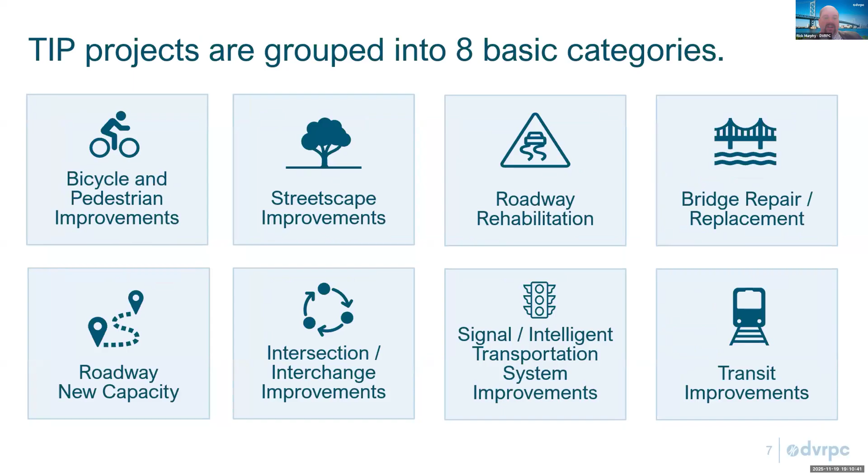These are multimodal programs, meaning they include automobile, transit, pedestrian, cycling, and freight projects as examples. Some of the projects are bicycle pedestrian improvements, roadway rehabilitation, bridge repair replacements, interchange improvements, and transit improvements.

A TIP project can improve multiple categories of those. So an idea can originate to solve one problem, but it can grow to address other opportunities. A roadway rehabilitation or reconstruction project could include improvements such as bike lanes, sidewalks, or traffic signals.

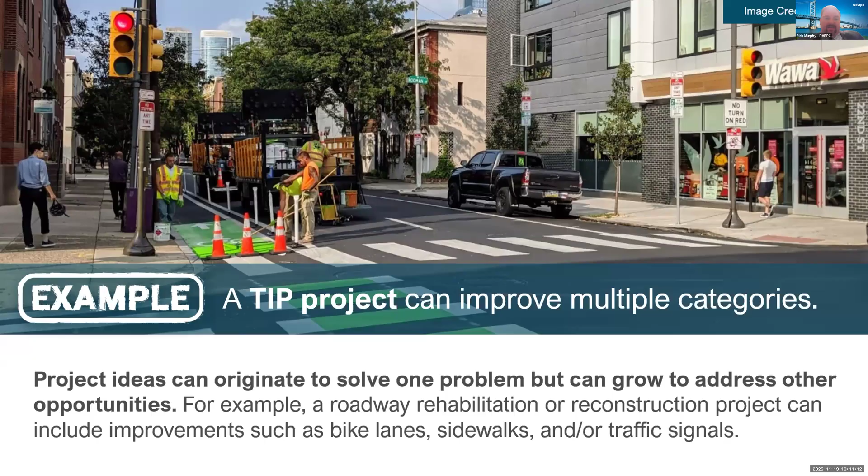An example is the Lafayette Street Extension project in Montgomery County. This was located at the junction of multiple modes of transportation, including regional highways, SEPTA's Norristown Transportation Center, and the Circuit Trails Network.

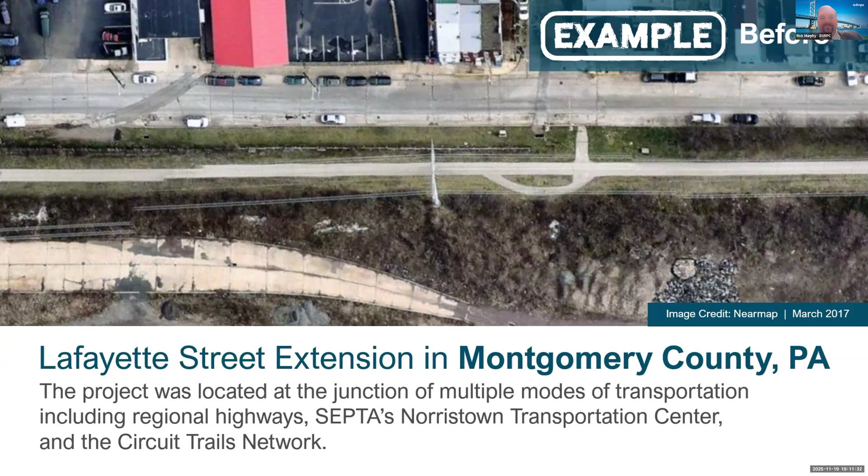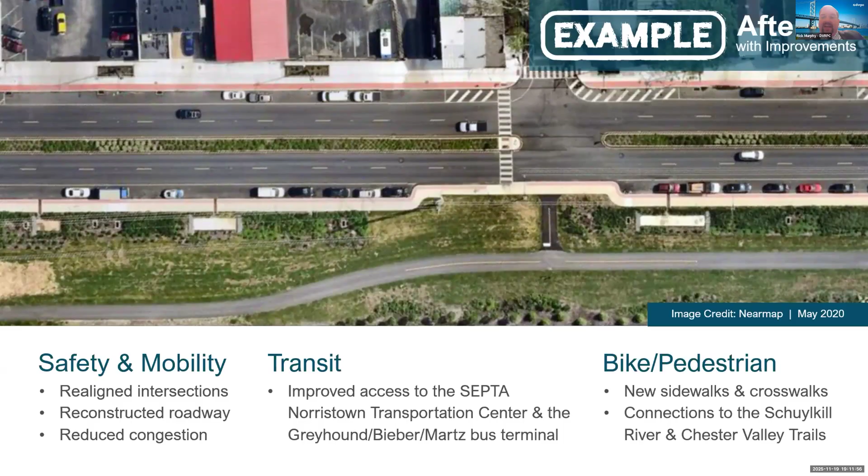Now, intersections have been realigned. The roadway has been reconstructed to reduce congestion. There's been improved access to the SEPTA Norristown Transportation Center and the Greyhound Bieber Martz bus terminal, and new sidewalks and crosswalks have been installed, and connections to the Schuylkill River and the Chester Valley Trails have been connected.

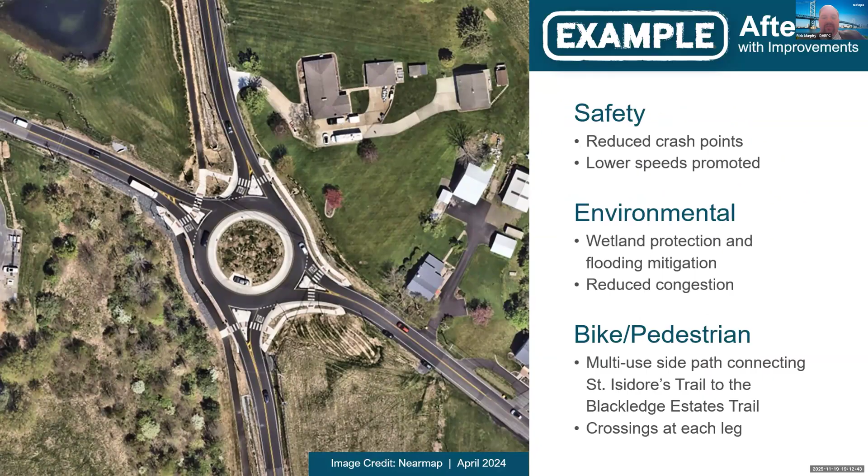Another example is Porter Road and Old Bethlehem Pike in Bucks County. The project improved an intersection from a four-way stop to a roundabout. This roundabout reduced crash points and has lowered speeds to promote safety. Part of the project included wetland protection and flood mitigation, and also aims to reduce congestion. There were crossings at each leg of the roundabout, and a multi-use side path connecting trails were installed.

So how the TIP is funded: we have approximately 500 plus TIP projects between the two TIPs for New Jersey and Pennsylvania. The federal funding comes from Congress. The latest legislation is the Infrastructure Investment and Jobs Act, which is set to expire on September 30th of 2026. That funding then flows to our federal partners at FHWA, Federal Highway Administration, and FTA, Federal Transit Administration. On the state side, they do something very similar at the legislature level, where they dedicate funding to the Transportation Trust Fund. Both federal and state funds then flow down to either transit agencies or the state DOTs to go on to either transit projects or multimodal roadway projects, and depending upon the project, some local funds are also part of it.

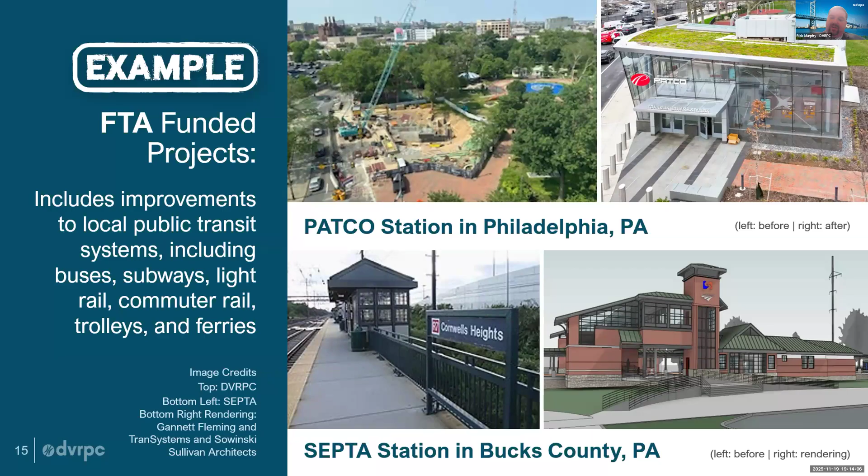Switching gears a little bit, DVRPC is considered a facilitator and convener where we bring local, regional, and state leaders, including departments of transportation and transit agencies, together to come to a consensus to decide on how we spend our limited transportation dollars.

So how do we do that? First, it comes from the vision, our updated Connections 2050 long-range plan. That outlines a set of goals, strategies, and priority transportation investments to help realize the vision in that document. That's an outlook of 25 years. The time frame closer to us, four to 12 years, is the TIP. The federal TIP is four years. PennDOT has a planning horizon of eight years after that, and they call the full 12 years the 12-year program. This institutes the short-term vision of the long-range plan.

More funding is needed at the federal, state, and local levels over the next 20 plus years to maintain the region's infrastructure and allow new projects to move forward. We can only afford approximately $80 billion, and that is available funding in the TIP. What we need to maintain a state of good repair is $163 billion.

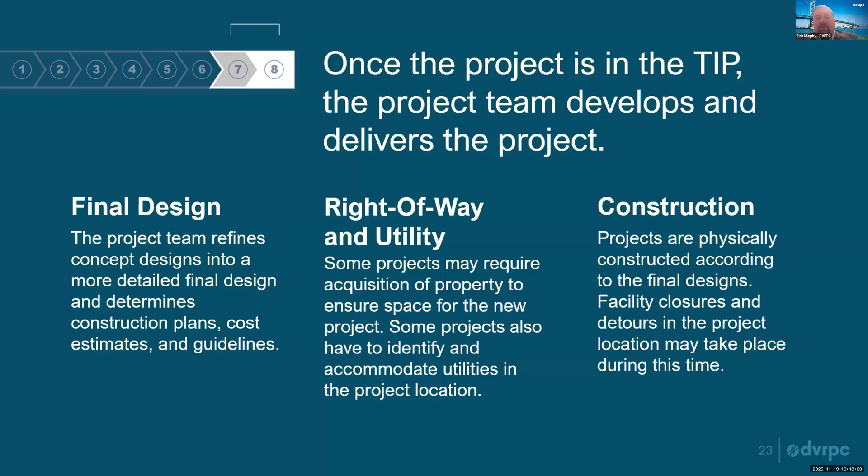So, how do you get involved in the TIP? You can provide your thoughts on projects within the TIP. When we go out for a public comment during our 30-day public comment period, which be on the lookout, we will have one sometime in the late spring. You can comment on specific projects or the specific program. You can also read about TIP projects in your area and send your comments using the links on the DVRPC website.

And we do accept comments year-round. For the 30-day public comment period, there's a specific application and website and email address that comments can be sent to. But throughout the regular course of the year, an email can be sent to public_affairs@dvrpc.org. We also have board meetings 10 times a year, and sometimes we'll have TIP projects that are presented for changes. At that time, you can also comment on those projects as well.

There are other ways to get involved. So you can contact your municipal and county officials about transportation concerns or project ideas. You can send your comments or questions to www.dvrpc.org/getinvolved/comment, or you can attend some DVRPC meetings, and you can find out more at www.dvrpc.org/getinvolved.

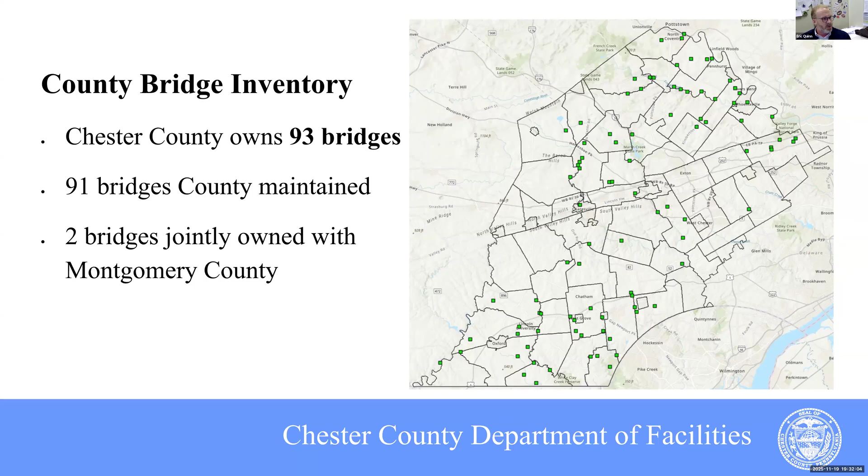Right up here is the Kime Street Bridge. Kime Street is one of the co-owned bridges, currently under construction. Montco really is in charge of that project, but if you're in the northern part of the county and aware of it, that bridge is currently under construction and hopefully will be opening mid-2028.

The county has 67 bridges classified as in fair or good condition, based on National Bridge Inspection Standards, NBIS. Right here you've got Watermark Road. This was a project completed back in 2024 in Upper Oxford Township, Bridge 21.

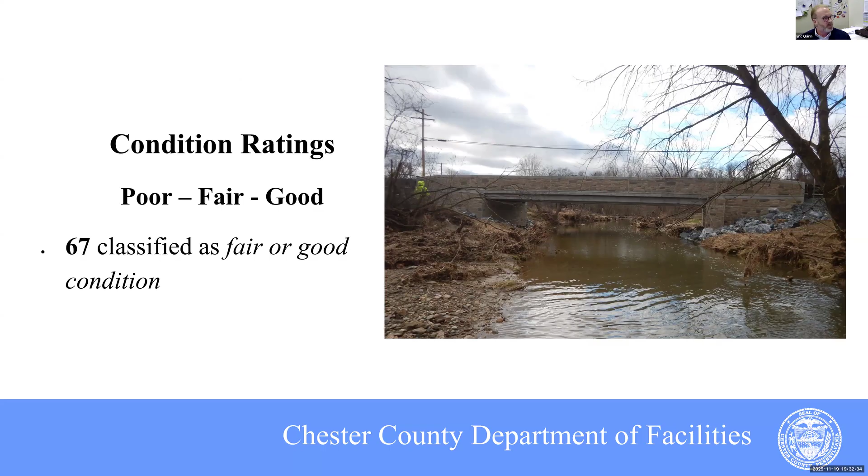The county has 26 bridges considered in poor condition. I would like to state that if a bridge is open, it is safe for travel, so bridges can be in poor condition and open and still safe for travel. That said, there are 6 bridges currently closed, 4 of those are in construction. The county has 43 bridges that have posted weight limits, which can affect oil deliveries, emergency vehicles, and other heavy equipment from using the structure.

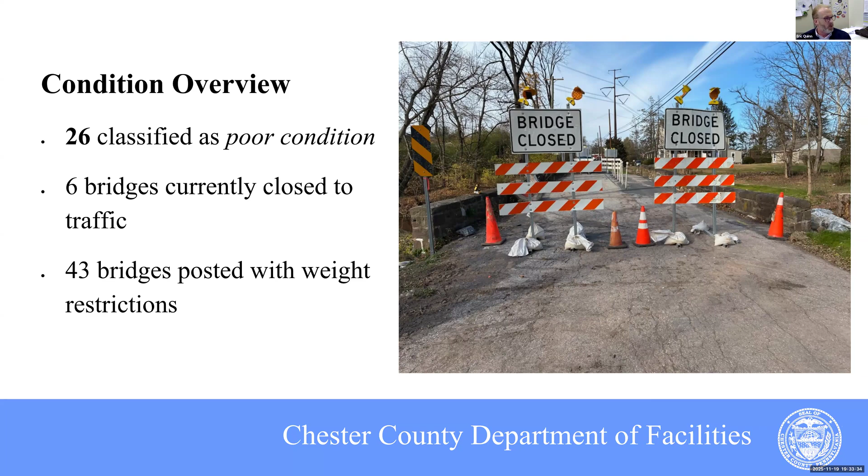This is County Bridge 207, Old Schuylkill Road, closed right now. It is in design for rehabilitation. It's the county's oldest bridge in its inventory, built in 1804. This is up near Parker Ford, East Coventry.

There are 24 bridges identified as functionally obsolete. That could be inadequate lanes, substandard geometry, sight distance, or inadequate safety features. So there's a number of things that could make a bridge functionally obsolete.

And then there are 37 bridges that are 50 years or older. This particular bridge, 92, Harvey's Bridge, Newlin Township, actually fits both characteristics - it's functionally obsolete and definitely older than 50 years. This bridge is in design, and hopefully we'll see it get into construction within the next 18 months.

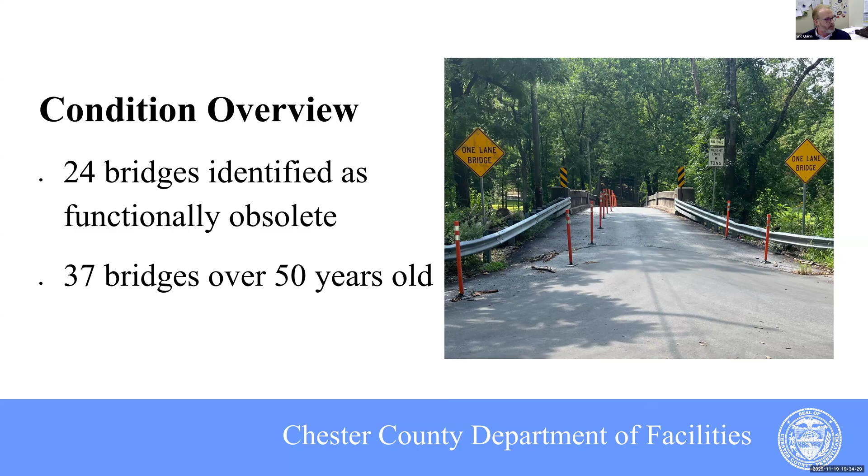The National Bridge Inspection Standards are federally mandated. Any roadway bridge with a span of 20 feet or more has to be inspected at least every 2 years. The inspections help our bridge program prioritize maintenance. They help the engineer keep an eye on areas of rapid deterioration, which we have some bridges that need more attention than others. They also help us determine prioritization ratings when it comes time to consider bridges for replacement or rehabilitation.

This particular project is 157 Dutton Mill Road, East Goshen.

This is a scour critical bridge. During this particular inspection, you can see the person's pole here that they use for prodding underneath of the foundation to check for soft spots and scour. This bridge was actually closed probably about 2 years ago for a number of months, specifically for a scour issue.

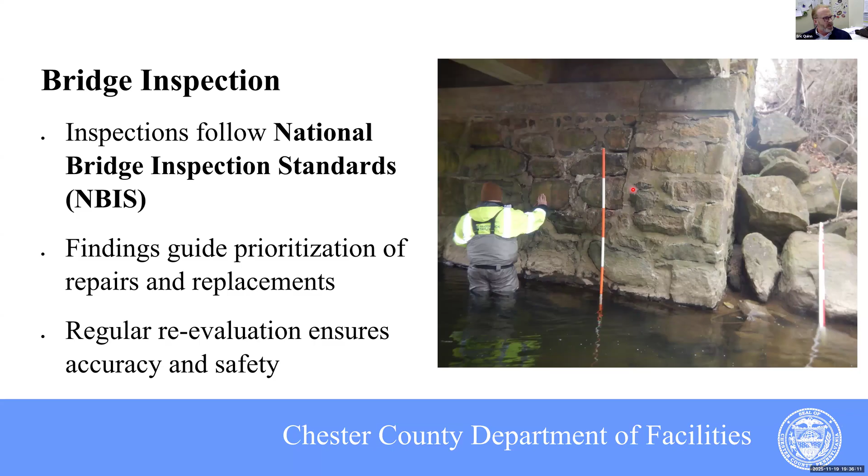This bridge is also in design right now for replacement. A number of challenges on this particular bridge: it's got a high ADT, a Sunoco pipeline that will need to be moved, and we've got some historic properties near the bridge that are also a bit of a challenge.

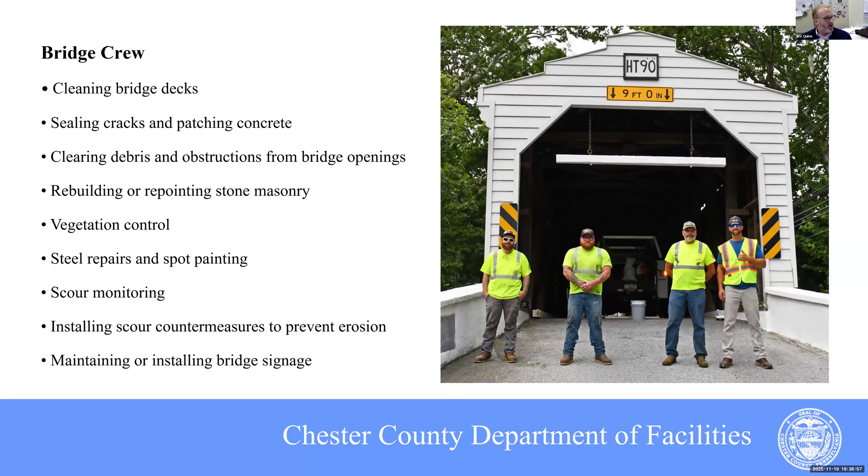NBIS inspections help us prioritize maintenance. Lots of our maintenance is done by our bridge crew. They are really a jack of all trades. They have to do masonry, painting, welding, metalwork, roofing, carpentry, asphalt, landscaping. Then some days there'll be heavy equipment operators. Every day is different. They also do scour monitoring for us after heavy rain events. These folks work out in the elements year round, and I'm very grateful for their hard work to help us keep these bridges safe.

The NBIS inspection ratings are also included in the county's structured prioritization method. This is where people will start to fall asleep a little bit. I'm going to keep this real simple. In this method, it's a bunch of calculations that are done.

Basically, 8 tangible factors go into it. You can see them up top here: the superstructure, substructure, deck ratings, load ratings, scour, which we talked about, deck geometry, which would be that functional obsolescence again. ADT is always a big factor, and then your detour length.

And then you've got your intangible factors, such as, is there a school nearby? Emergency routes - is it part of an emergency route? Is there new construction in the area? And of course, a big one for us here at Chester County is historic preservation.

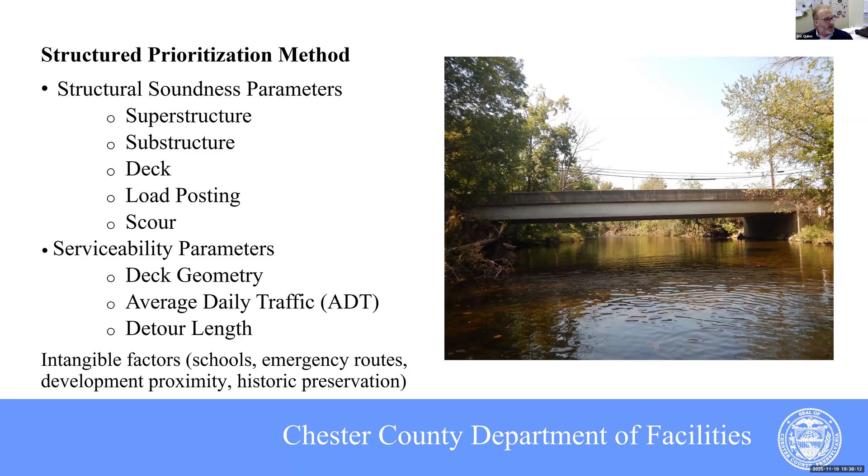And of course, considering historic preservation, and then just in general, we always are involving public comment with all these projects, I should say. Funding sources.

Planning Commission plays a critical role helping us secure funding through the TIP. Also, thanks Rick from DVRPC for that. Obviously, federal funding and state funding through the TIP. Also the retro reimbursement.

We don't have anything on the horizon, but the county does have a couple retro reimbursement projects right now. The county has to basically foot the entire bill, design and construction, and then apply for reimbursement after the project is complete, and they can get 80% back for that.

There are actually two projects going on right now. And then you've got your Act 13 funding, which I know was mentioned earlier, and Act 89 $5 fee funding. Every time you register your car, there's that little $5 fee. Well, that is funding that goes towards helping keep the county bridges open and safe.

And then, of course, liquid fuel. So every time you're filling your gas tank, there's a little bit of funding that comes back. That actually goes to pay salaries for the bridge crew, myself included, general maintenance, and then it also goes towards paying for consulting for the bridge engineer.

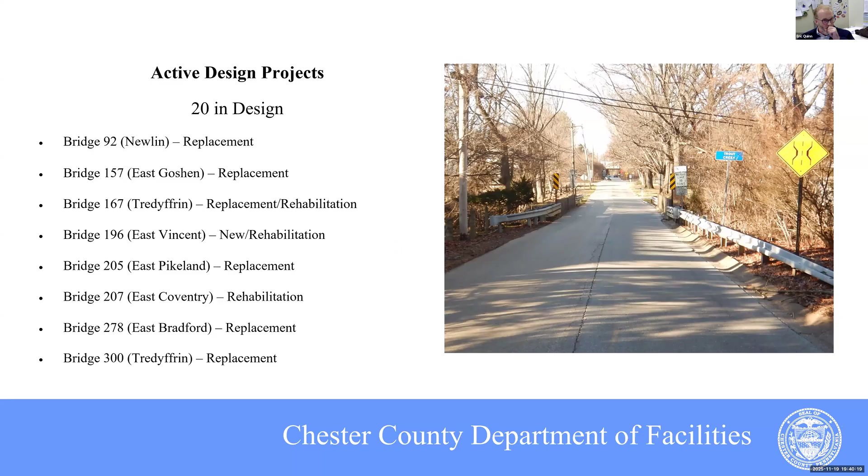And then we've got 4 bridges technically in active construction, 26, which was the first bridge on the slideshow. It is open right now, but there's still a couple punch list items, so it's going to stay on the active construction projects for now.

This particular picture is 65. This is in East Marlborough Township. This is actually what we consider a preservation project. It's not really a full rehab, but this bridge was tented, sandblasted down to the metal. It's going to be all fully repainted. They've got a new steel grid deck on it. And this bridge, I think they were supposed to pave today, but the rain probably held them off. So hopefully we'll have this bridge open back up to traffic next week.

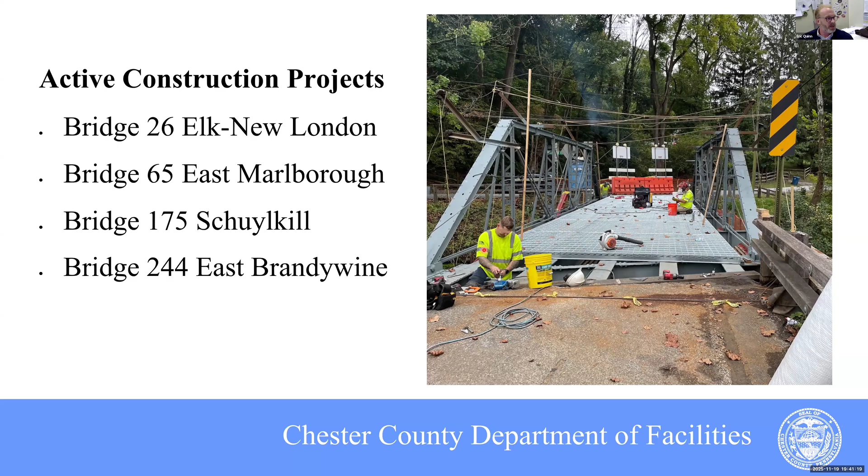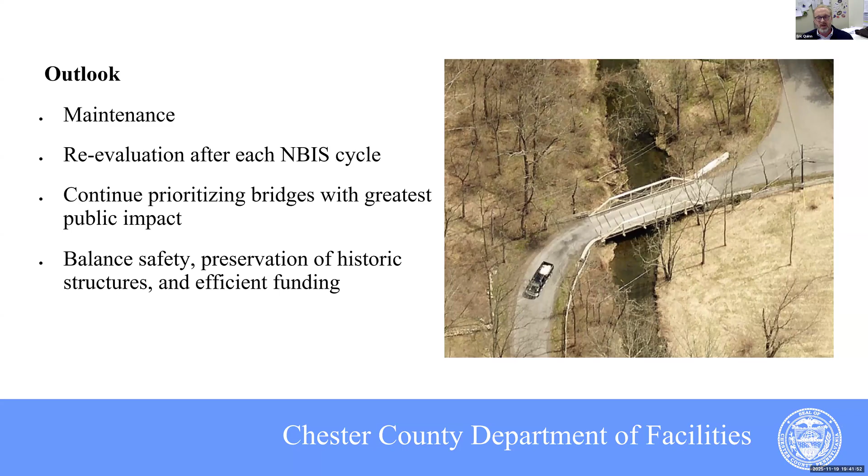And outlook: continued maintenance, always going to continue with maintenance. Reevaluation of priorities after each NBIS cycle, and which is going to have the greatest public impact as far as new projects, and then really what I call threading the needle, balancing safety and preservation and efficient use of funding. So, and that's it.

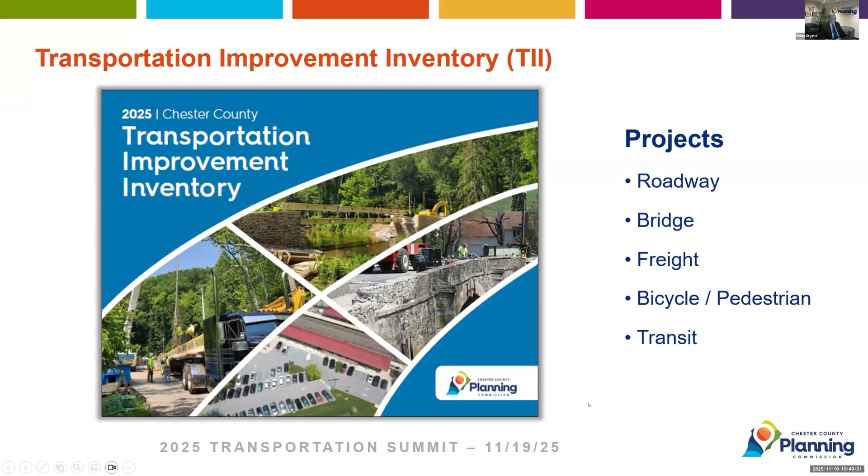So the first thing we're going to talk about is really appropriate, especially for Rick's contribution this evening. So every 2 years, we begin our transportation programming and funding process with the update to our TII. Some of you may be familiar with this process and maybe not for some others. So what we do is every 2 years, we reach out to our 73 municipalities just to see what their transportation goals and needs are.

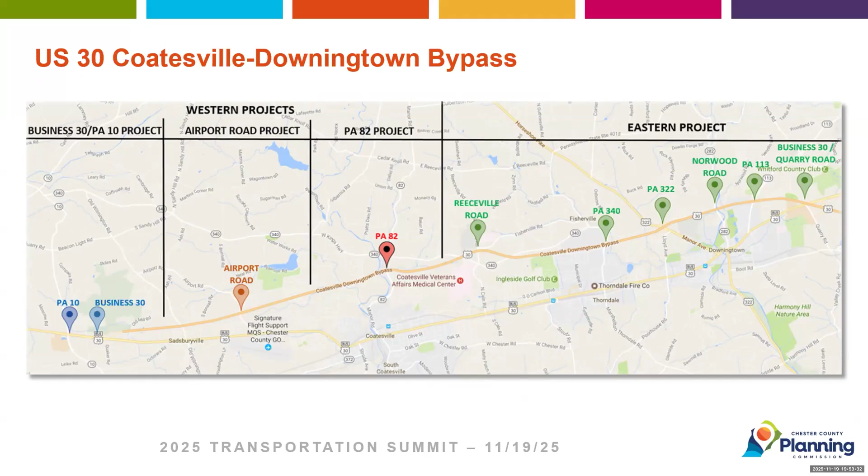And so the 3 western sections are Business 30, the terminus of the bypass at PA 10, Airport Road, and 82. So construction on the western terminus at PA 10 should begin around 2031. Airport Road construction is hoping to begin at 2029. And at 82, construction is hoping to begin in late 2030, and the estimate on the eastern section beginning is late 2033.

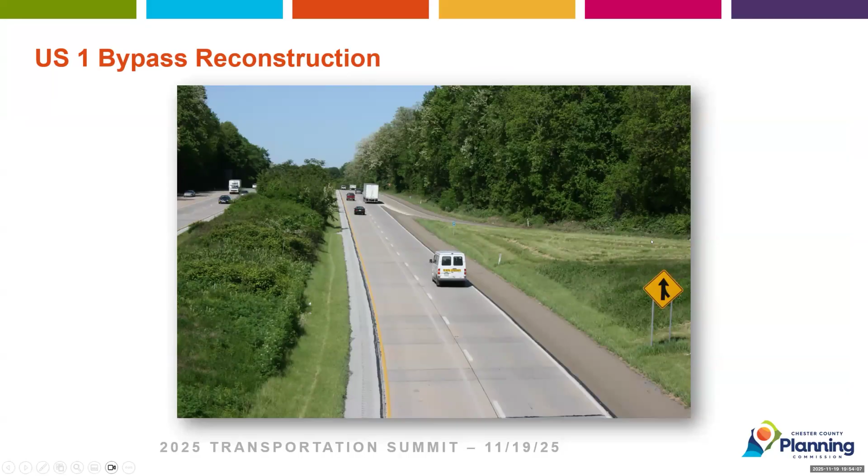Another big major regional project is the US 1 bypass reconstruction. It's a little different than 30. This is a lighter lift, since it doesn't need such a wide shoulder added. It does have some bridge reconstruction, repaving, wider shoulders, and some improvements to the interchanges and roadways that connect to Route 1. Construction is hoping to begin in late 2027. It runs from the PA-Maryland border to just west of Longwood Gardens at Schoolhouse Lane.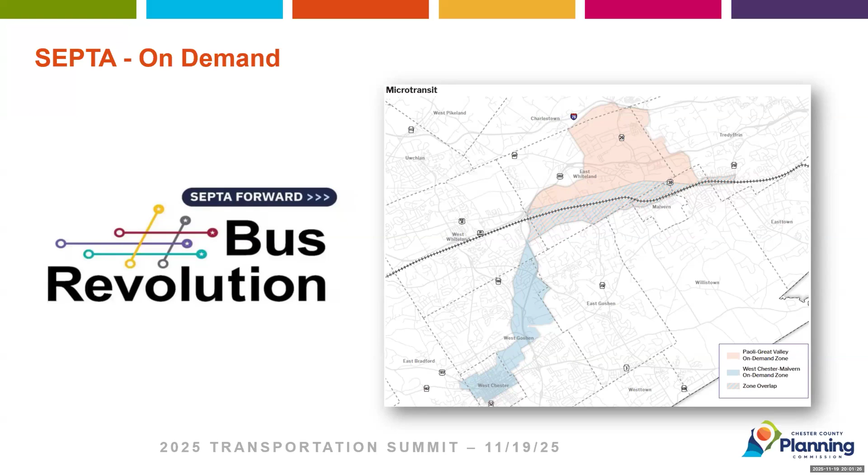Another thing to look forward to next year is the opening of the Amtrak Coatesville station. The new station's moving about a block east from the current station. The current station is essentially an old dilapidated building with poor lighting, poor access, and minimal parking. All of that is going to be gone, and we'll have a nice new station along with a lot of pedestrian and streetscape improvements in the city of Coatesville. Construction is roughly 55-60% done, and I think we're looking at either third or fourth quarter of 2026 as the opening date.

Amtrak has said they will increase service at Coatesville once the new station is open. Right now, not all Keystones stop at Coatesville—many of them run by—so that's also something to look forward to. Next slide.

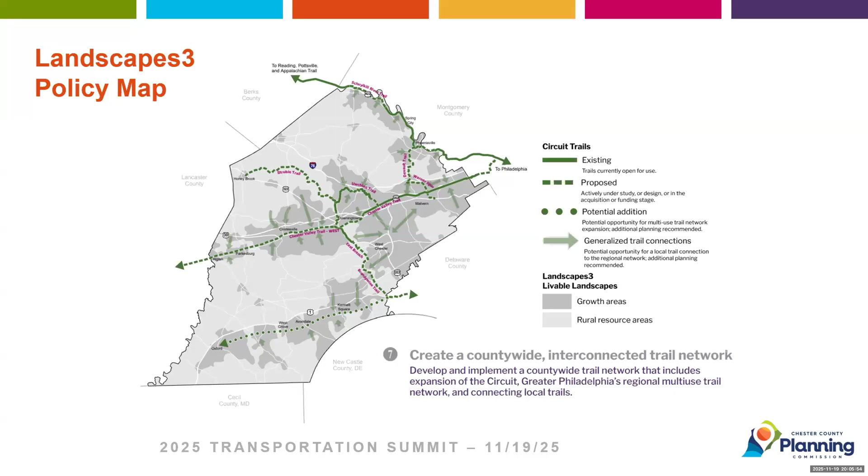All right, so the first project that we want to highlight here is the Chester Valley Trail Phase 4A extension. This project is located in Exton in central Chester County, and the project will extend the Chester Valley Trail from the Main Street at Exton Shopping Center west to the Oaklands Corporate Center.

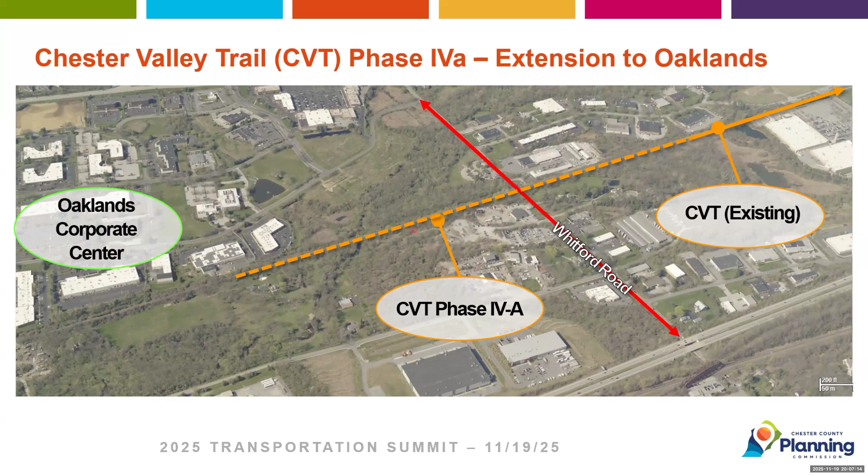Construction on this project started in July, but during site clearing, the contractor actually ran into a number of sinkholes on the western end of the corridor. Because of this, we did have to pause construction for a little bit while we came up with a plan for addressing the sinkholes, but work has resumed now on the project, and it is the contractor's plan to continue working through the winter so long as the weather permits. At this point for construction, we anticipate that it will extend into the middle of next year, but we expect that the project will be wrapped up in 2026.

Next slide. All right. So our next project here is the Chester Valley Trail West Enola Low Grade segment extension to Atglen. This project is located on the far western end of Chester County, just outside and going into Atglen Borough. This project is really exciting because it'll connect to the 29-mile long Enola Low Grade Trail, which is almost complete in Lancaster County.

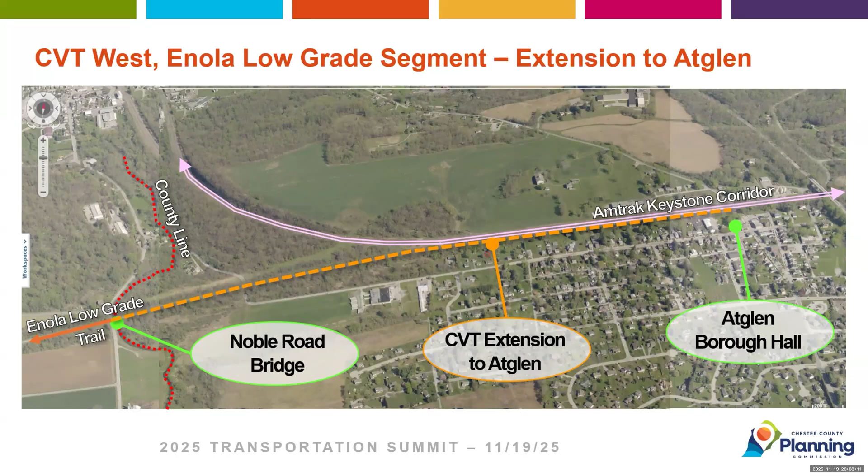next to the Amtrak Keystone Corridor, which is highlighted in the pink line on the screen. The eastern terminus of the trail then will be at Atglen Borough Hall, where the trail will connect to a trailhead that was constructed by the borough as part of a park and playground project completed in 2024.

This project is currently in the design phase. We did receive grant funding for both the design and construction phases. We anticipate design will go through a good portion of 2026, largely due to the time needed to coordinate and review with both Amtrak and SEPTA, given their impacts on this project. This sets us up for construction to likely be underway near the beginning of 2027.

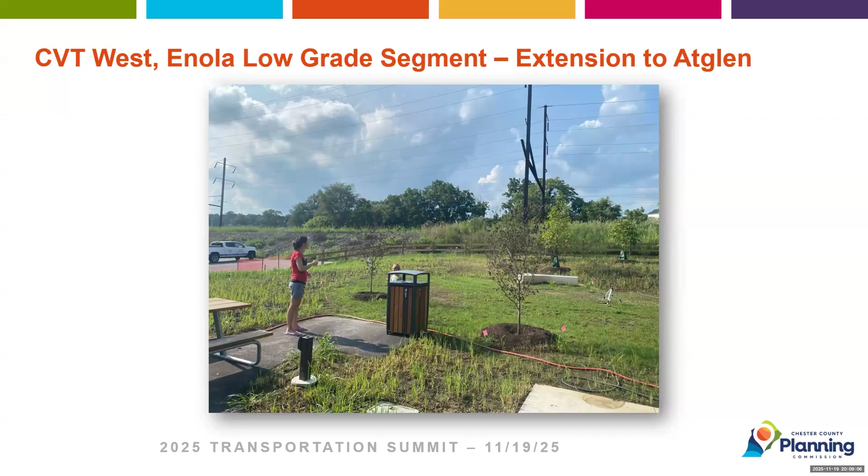All right, so the next project is the Chester Valley Trail P&T extension. The P&T is a historic rail corridor running roughly between Frazer and Thorndale. It was built in the early 1900s as a low-grade freight rail to bypass the more heavily trafficked main line of the Pennsylvania Railroad, but rail operations ceased on that line in the late 1980s.

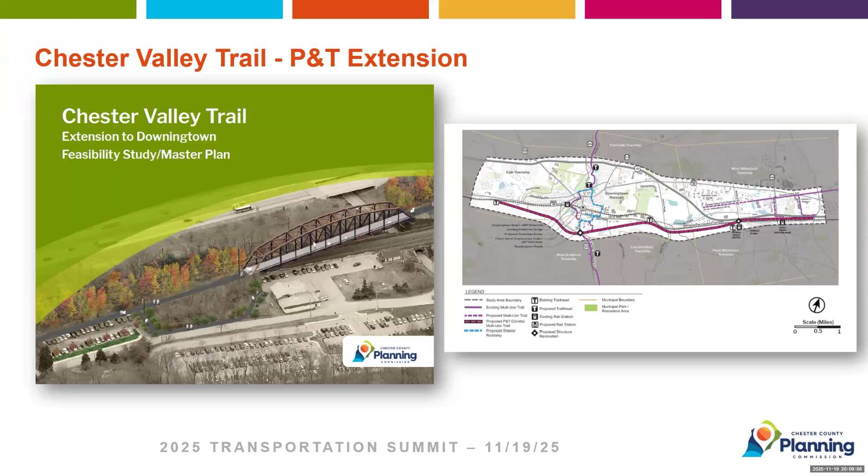We did receive a $500,000 grant from PADCNR that's going to go towards design and engineering of phase 1, and we should be officially underway with design at the beginning of 2026 once we have an engineer under contract. We'll also be looking to get going on phase 2 in the first quarter of 2026, which involves renovation of the Downingtown Trestle.

To date, we received $700,000 in grant funding from a combination of DCNR and DVRPC for phase 2, and we also have a pending application for another $500,000 from DCNR, which would provide the remaining funding needed to cover this design. Just a quick note, this entire project is on the TIP that Rick talked about earlier, so we do have construction funding lined up for this entire 7+ mile stretch.

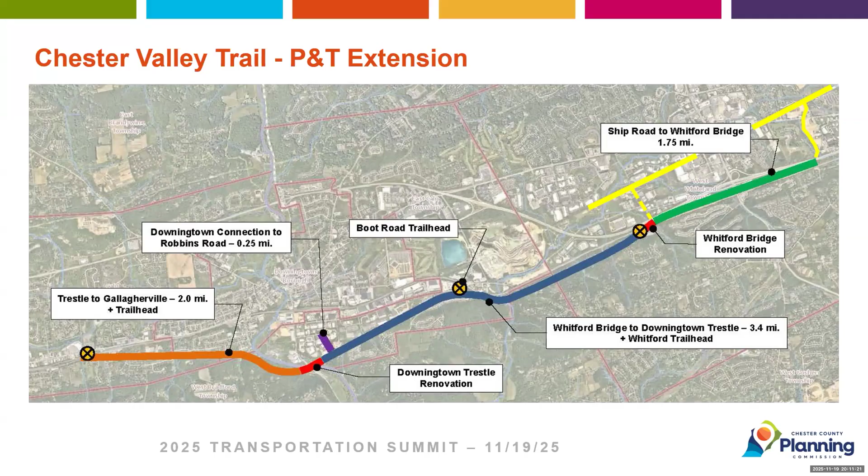This really is a complex project, and because we're using federal funding, the project needs to go through the federal funding process, which adds time and approval requirements, as Brian was speaking to earlier. In all reality, it'll probably be about a decade before this entire 7+ mile stretch is complete.

We do have a webpage on the Planning Commission website that provides an overview of these different Chester Valley Trail projects, and we try to keep it updated with news and updates as they happen. The link is at the bottom of the screen, and may also come up in the chat, as a resource for the public to check in on what's happening with these projects.

The last project to mention is an extension of the Struble Trail. The Struble Trail comes north out of Downingtown Borough and ends at a trailhead at Dorland Mill Road. This current project will extend the trail about 800 feet to the north, creating a new connection to Marsh Creek State Park. The trail will cross Dorland Mill Road with a signalized trail crossing.

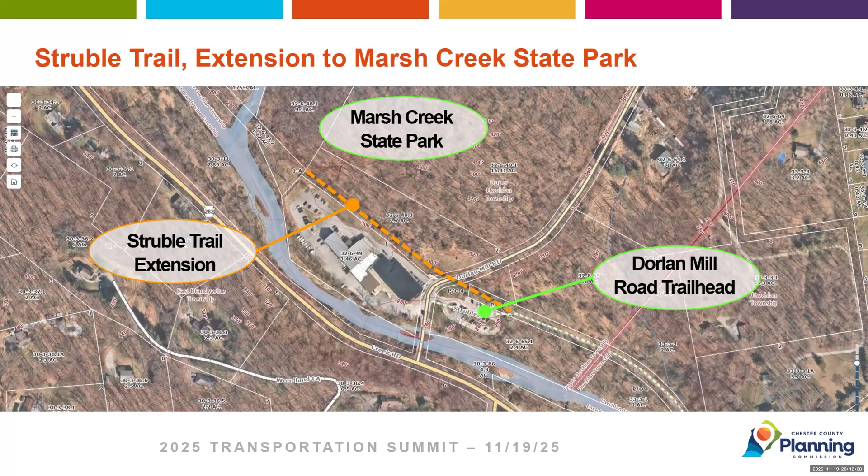This includes new ADA ramps, as well as a signal with flashing lights and signage. Design and engineering on this project is largely complete, but we have run into some delays trying to get an HOP permit approved through PennDOT. At this point, we should have design and permitting completed by early 2026, after which we can put the project out for construction.

The last thing I want to bring up is we're also looking to advance implementation of the Chester County Trails Master Plan. We completed the master plan in 2024, and it identifies over 300 miles of existing and proposed trails throughout the county. One of the core things we're looking to do is work with our local partners to help implement some of the different trails in the plan.

Specifically, the plan identifies 10 different catalyst projects, and as part of our work program, we'd like to assist municipalities with advancing these different trails. I would encourage everyone to check out the plan and feel free to reach out to me if you have any questions or want to hear more about the Chester County Trails Master Plan.